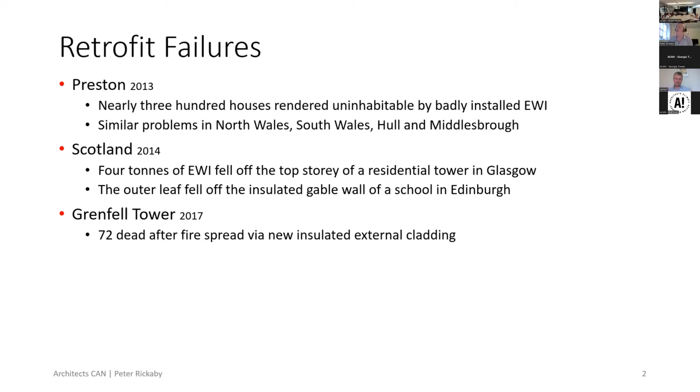There were some failures in Scotland in 2014, mostly to do with a particular big storm, which caused some collapses of retrofitted buildings. There was, of course, the Grenfell Tower, which you will all have heard of, and is still with us and still producing new revelations and new misery today. And then what probably most people haven't heard of is that there were numerous insulation failures in the period 2010 to 2020. I'm not talking a few hundred, I'm talking a few thousand, and they were mostly following poor installation of cavity wall insulation or external wall insulation or inappropriate installation.

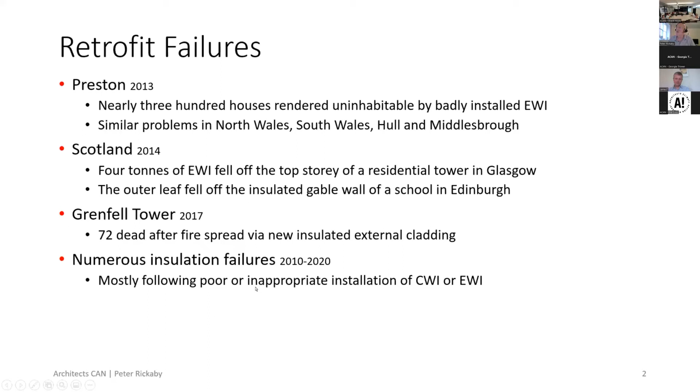So that all led to a review, which many of you will have heard of, some of you will have participated in, I'm sure, and that is the Each Home Counts review. It was industry-led, but sponsored by 2 government departments, led by Peter Bonfield from BRE, had multiple work streams and involved hundreds of people who gave their time up voluntarily for about 18 months to work in those work streams. It produced 27 recommendations, and the focus of Each Home Counts was on the consumer. It was about standards and enforcement and consumer protection and consumer advice.

Of the 27 recommendations, I'm only going to deal with the quality and standards ones, because that's really where PAS 2035 comes from. And then you might think that Each Home Counts has disappeared out of sight or sunk without trace. In fact, there was a 3-year period when it was being implemented by a cross-industry implementation board. I was a member of that board, and BEIS has to date spent at least £3 million and recently promised to continue to fully implement the review. So we are on a journey with Each Home Counts.

The review had 2 strategic objectives in response to those failures we started with. One was to boost demand for retrofit by restoring the trust in the industry on the part of consumers, housing organisations and government, and also reducing the risk to finance bodies to encourage them to fund retrofit, because of course the government's always been quite keen not to have to fund it all itself. But finance is only available if risks are reduced. And in fact, I remember being told by a banker from BNP Paribas that they had lots of money to put into retrofit, provided we de-risked it. And I was at pains to tell them we couldn't de-risk it, but we could manage the risks for them.

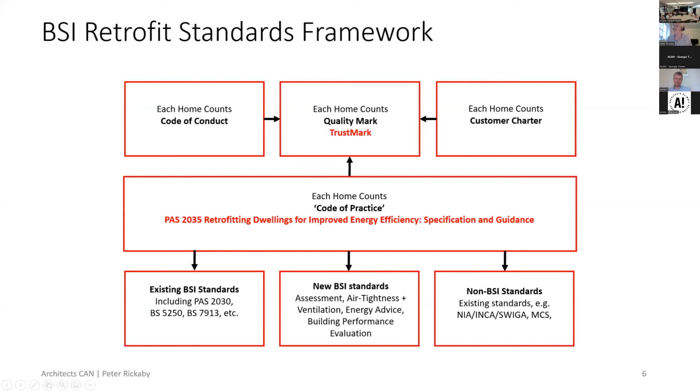So after inception and some advice, there is a risk assessment, which divides projects into high, medium, and low risk, and they follow respectively paths A, B, and C, three separate paths through the standard, through the PAS.

There is then a whole dwelling assessment, which includes an assessment of the existing ventilation and a significance assessment if the building is traditionally constructed or protected under BS 7913, to find out what its particular characteristics are that we need to think about. There then follows an improvement option evaluation.

The purpose of that is to determine what are the best measures to apply to this dwelling to get it where we need it to be by 2050. So it's looking at the horizon and looking at zero carbon. How do we get this dwelling to zero carbon? What are the best measures to do that?

And that then underpins a medium-term improvement plan, which is how do we get there from here? A staged plan from getting from where the dwelling is now to where it needs to be in 2050.

All of that is agreed with the client alongside some advice and becomes then sent to the designer for at least the first stage of the medium-term plan to design and specify it.

And the design and specification requirements are by far the largest part of PAS 2035. I'll come back to design a little later. Once we have a design, it's passed to an installer or a contractor.

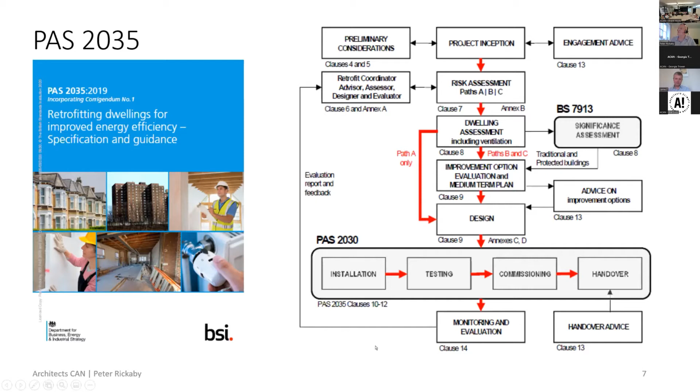To summarize it in a slightly different way, a few key points. First is that all projects must have a retrofit coordinator, which is, of course, the main topic of this evening.

There is a minimum professional qualification for retrofit coordinators, a level 5 diploma, but all the other roles in retrofit in PAS 2035 also require minimum qualifications, whether they be assessors, advisors,

designers, or so on. There is a risk assessment, as I said, based on pre-dwelling assessment data, which determines the path through the PAS. And the required qualifications for the professionals actually depend on the assessed risk.

Then there is a whole dwelling assessment, which covers six topics. It's way more extensive than an eco assessment or a Green Deal assessment or energy performance certificate, EPC assessment.

It covers the context of the building, both legal and geographic, the condition of the building, structure and damp and so on, the occupancy and the vulnerability of occupants, the energy performance in the normal way, capturing SAP data, the existing ventilation system, and the historical or cultural significance of the building.

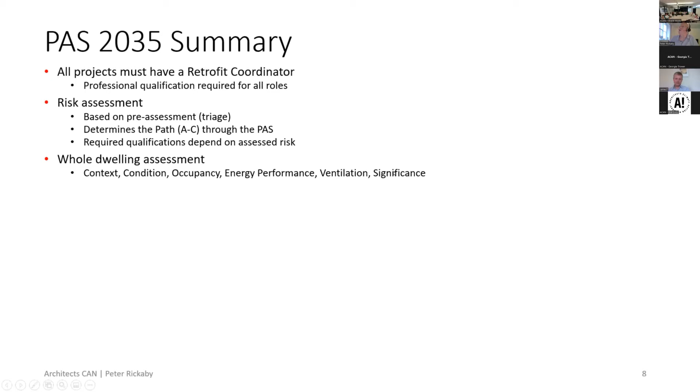Then there's a design process which starts with the improvement option evaluation we've talked about, to identify required improvements to 2050, and a medium-term improvement plan to establish a staged process for getting there.

There are then extensive design requirements, including attention to moisture management, thermal bridging, thermal bypass, interactions between measures, and so on. And there are additional requirements if the building is traditionally constructed or is a protected building.

For ventilation, the existing ventilation system has to be assessed as part of the whole dwelling assessment. And if it's deemed to be inadequate according to certain criteria, then it must be upgraded. Or if it will become inadequate because of the retrofit work, it has to be upgraded.

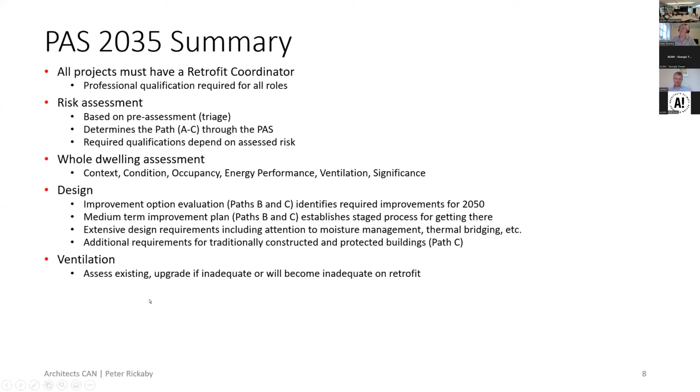Installation, as I've said, has to comply with PAS 2030 or the MCS standards. And then we have finally the post-completion evaluation process, where essentially we check, did we do what we said we'd done, and has anything surprising happened?

And we investigate discrepancies and any unintended consequences. So we're trying to close the circle with the evaluation process, which is interestingly something that the retrofit industry, or the energy efficiency industry, had never done before.

It had never agreed outcomes with its clients, because most of the clients were not the householders, they were the funding bodies or the energy companies, and they never checked afterwards that they'd actually achieved them. So we're trying to get the energy efficiency industry with PAS 2035 to do what any industry worth its salt would do,

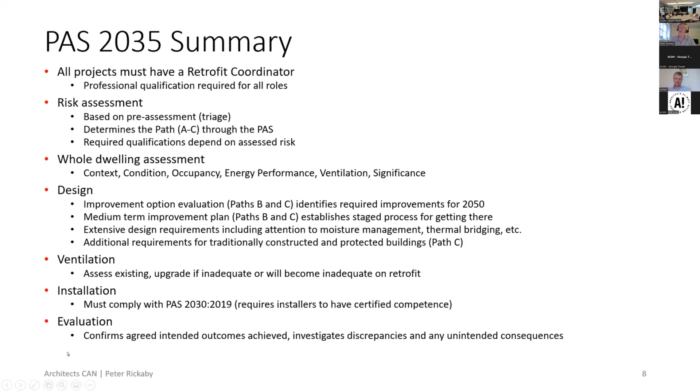which is to check with its customers whether they're happy at the end of the process. So to sort of summarize the quality assurance system into which PAS 2035 sits, we start, as I did this evening, with those failures,

which occurred around the same time as many of us who were architects doing work in retrofit were learning from programs like Retrofit for the Future, from the Centre of Refurbishment Excellence, Core, in Stoke-on-Trent, from the GLA Renew program, and other schemes where we were learning what could go wrong and why.

And how, and what to do about it and how to manage the risks. And that led us into the Each Home Counts review, and that led us to Trustmark, the retrofit quality mark.

Trustmark has two arms to it, if you like. One is compliance, auditing, inspections, enforcement, remediation, and redress. So that's to do with enforcing the standards, and in particular PAS 2035. And it also has a data warehouse where records of all PAS 2035 compliant retrofits have to be uploaded.

PAS 2035 is a requirement of Trustmark retrofit programs, and PAS 2035 itself, through the framework that we've discussed, brings in lots of other standards. So it's not just PAS 2035 as a process, it's all the standards that we know about that are valid and relevant to the project.

When it comes to installation, we have to install in accordance with the MCS standards or PAS 2030 or both, and records of all that work get uploaded to Trustmark, who can use the data in the data warehouse to risk assess what they audit and inspect, but also for research into how people are doing and who's cheating and things like that.

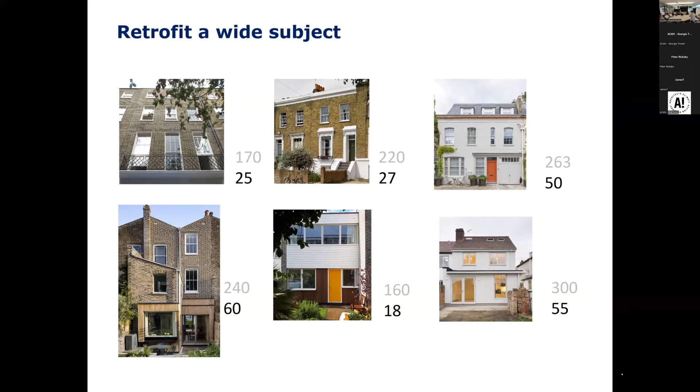The grey numbers are the specific space heat demands as found, and the black numbers are the specific space heat demand - the number you see on PHPP - when we finished. Quite a range of numbers and a range of starts and finishes. Oh, there we go, I don't know why that decided to animate itself. That's my own place, which we finished, or are finishing, after about 6 years of doing stage retrofit.

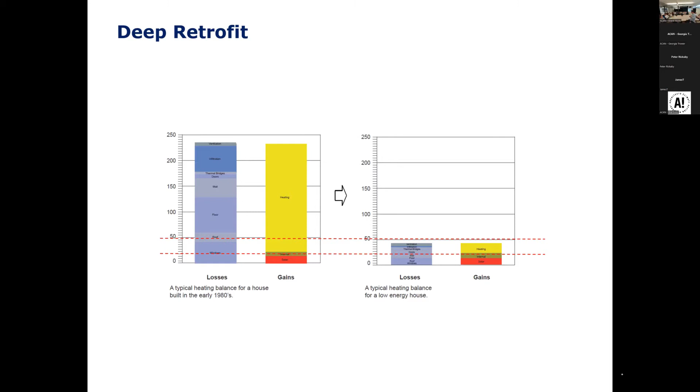I think we're especially focused on projects which aim fairly ambitious and are really what I call deep retrofit. That's a comparison of the passive house planning output of an existing building. The stuff on the left shows very big losses, very big boiler use to offset that, and on the right is where we like to be - much smaller heat losses, much smaller heating demand, where it's much more viable to use a low carbon heat source.

I think the other thing about owner-occupied dwellings, or private homeowners, is that they represent more than half of the housing stock in the UK. A lot of the larger scale retrofit schemes today have focused on social housing, and there are obvious reasons why. But even if we were able to sort out all the social housing in the UK, we'd only be touching probably 20-25% of our stock. More than 50% lies in this atomised sector of private homeowners. For me, that's one of the reasons I'm remaining committed to that sector, because it has the most potential if enough of those people step forward.

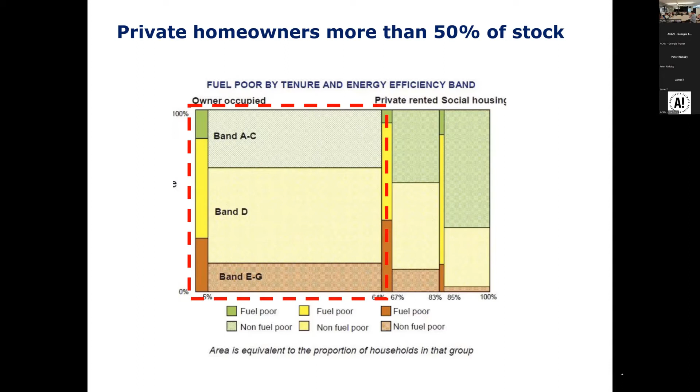Motivations for those people, or my clients, are usually these sorts of things. Health and comfort, increasingly important for a lot of people, and certainly for my own retrofit that was at least half the reason I was interested in sorting the building. Carbon emissions reduction, of course, and increasingly - for a long time we've lived with cheap fuel, and people have said the payback time on all this stuff is like forever. But remarkably, in the last 18 months that's been turned on its head, and it looks like we'll never quite return to the good old, or bad old, days of really cheap energy. I think it's probably a good thing, though in the short term a lot of people are going to pay a very heavy health and comfort price.

So I'm going to talk about our approach, generally moving through the key stages of the project. For us those are assessments, which Peter spoke about, design, forming a whole house plan - to use a typo at the end - coming up with a set of measures, thinking about what the real predicted energy use is likely to be, and then through planning, delivery, and onto evaluation. This image, apart from an easy joke about does my bum look big in this, is me trying to say we're really keen at the early stages of projects to get underneath the skin of buildings and understand them quite intimately, because it's often the small details which really drive the risks and drive the solutions.

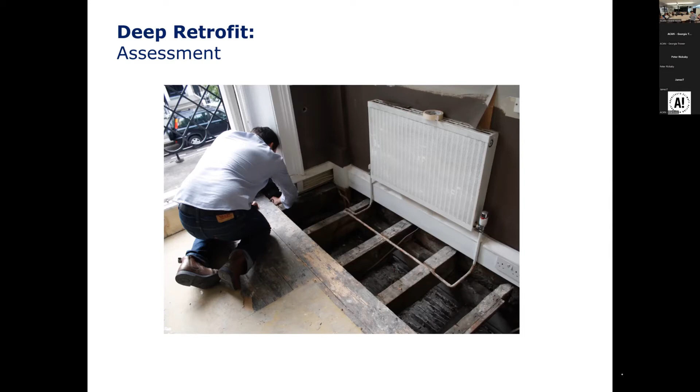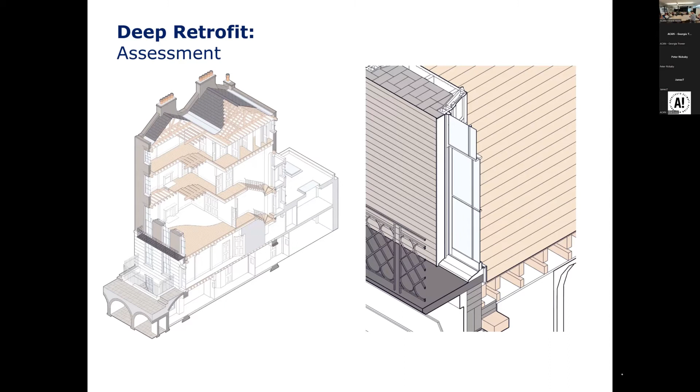So opening buildings up as early as we can is really important, particularly on a building like this, which is quite complex, historic. And then converting some of that information into drawings to sort of understand how buildings go together three-dimensionally, so that we can start to think about how insulation might overlay the structure in a positive manner and in a safe manner, and in a manner which the conservation team might find palatable.

That assessment involves going around the buildings, looking at them in different ways. So thermography is often a useful technique to sort of put on the X-ray specs, and in this case we

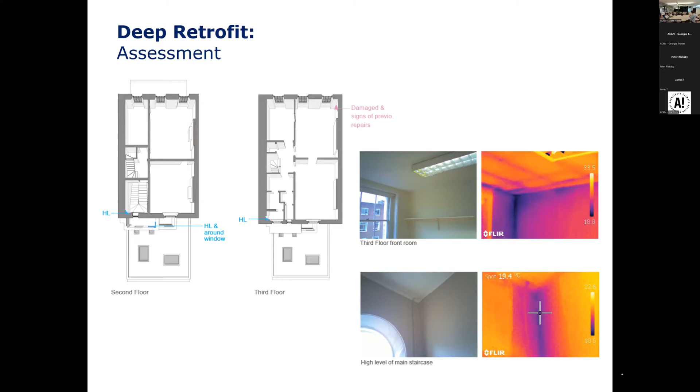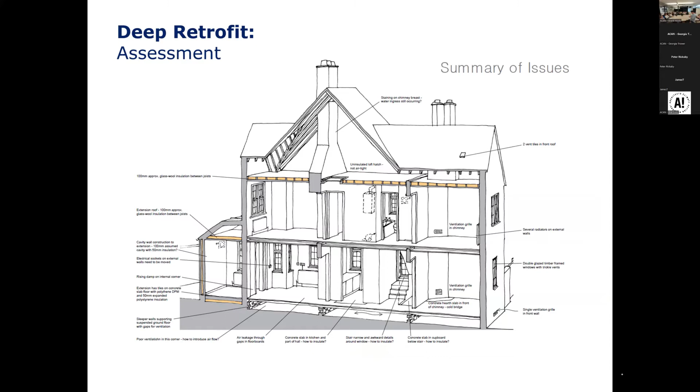found both thermal bridges but also moisture problems were showing up through thermography. And then again, we like to try and put all that information together in some kind of record. One form of that record, rather than sort of 5 pages or 20 pages of text, is sort of a 3D assemblage of some of those observations of the building.

So I think the longer we work in this sector, the more time we spend on assessment. You might think it should be the opposite, that the longer we're doing it, the easier it gets, but actually the more we realise understanding that stuff early on is really crucial to really getting to the end.

So clients often approach us and say we'd like to go to EnerPHit. We said we'll look at that for you, but let's see where we might get to. Is that realistic? Is that a safe thing to do?

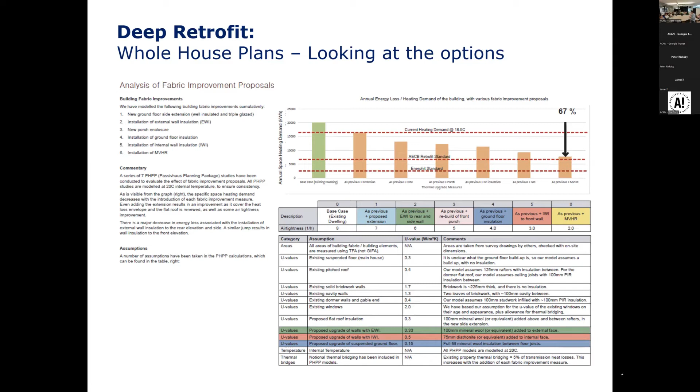So all the stuff below the graph, by the way, is all the assumptions that we put into the model, which we try to articulate very clearly, because there are always lots of assumptions involved, so it's important to record those as we go.

So there's quite a lot of computational stuff going on, but then there's also some architecture happening parallel to this. There might be an extension, a refurbishment, or a reorganisation of a house, and then we try and pull the retrofit stuff together with the architecture stuff and present it in a three-dimensional manner again, so that it's meaningful to us and to our clients.

And so, especially our clients, they're not building professionals, and often technical plans and sections are slightly lost on them. So we always try to go back to 3D. And 3D always informs us where we've made mistakes in the areas and the stuff we've got to resolve later on, in detailed design.

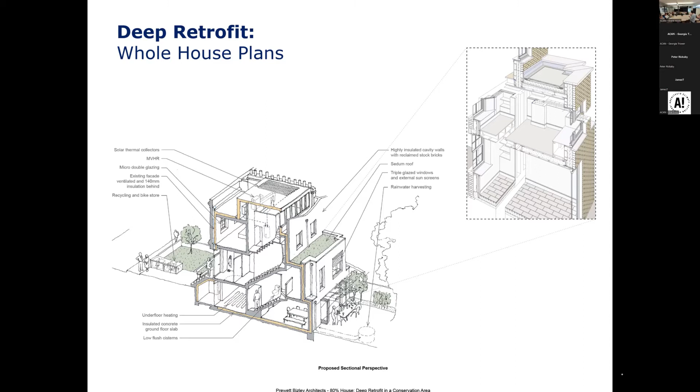This is another sort of simpler way of doing it, where we've shown kind of where the key retrofit measures are being applied to a building section. So insulation, glazing upgrades, M&E, heat delivery, and so on. It's a sort of a simple kind of graphic that people can

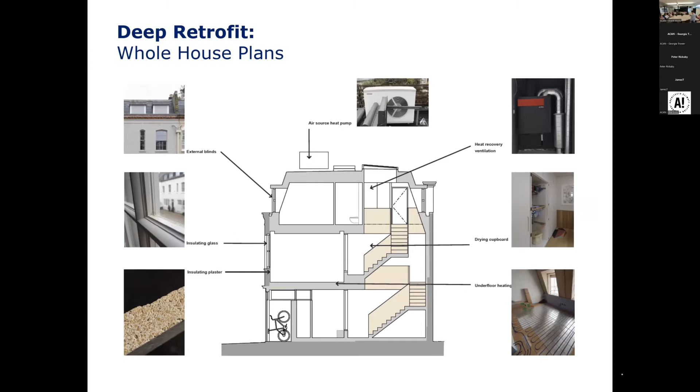understand. And at the same time, as we think about, we're often very focused on the space heat demand, because that's where most carbon is deemed to be. But we increasingly spend more and more time evaluating, is this leading to increase or continued overheating risk?

So most of our projects are in central London, and I think it's fair to say, almost all houses suffer with some degree of overheating. That's just going to get worse and worse for us.

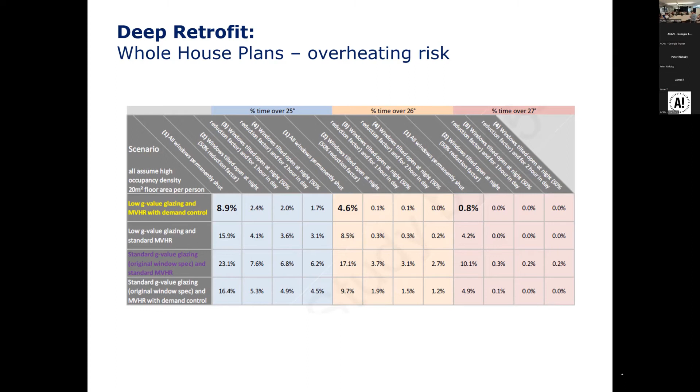So this is sort of a PHPP stress test model we used on a project a few years ago. There's quite a good tool at CIBSE recently, which we're starting to use as sort of a regular assessment too. So, but overheating, I think, was for a long time sort of forgotten.

So key things in whole house plans that we try and get to as early as we can in the project, so by sort of stage 3 of RIBA.

So decide what the fabric measures are, really have a sense of how thermal continuity and air tightness continuity is to be maintained, and really start to resolve all the interfaces, because Peter's probably recited 10,000 times that retrofit generally goes wrong at the interfaces, the junctions and the corners and so on.

Having a ventilation strategy quite early on, both one for winter and also one for summer. So one that works with the overheating de-risking, and one which manages heat loss in winter. Designing in increasingly low carbon heat now.

Until recently, about 10 years ago when we started, the mantra was gas boilers are the way to heat. And that's just been completely turned on its head in the last 4 or 5 years as electricity has decarbonised massively. It's one of the few success stories of the last 10 years. Planning in the potential for renewables, even if those follow later.

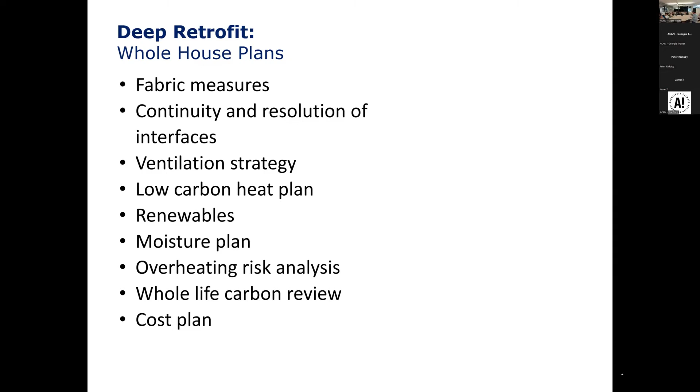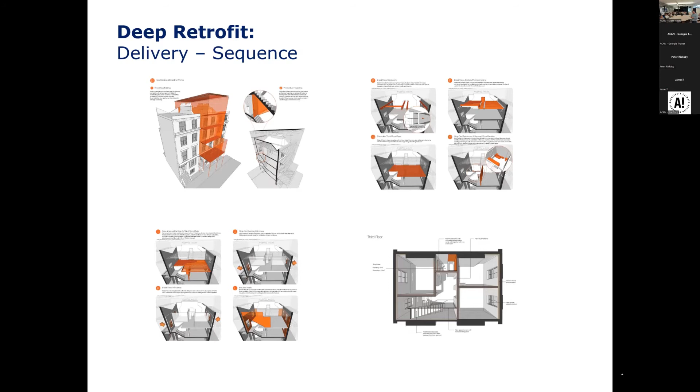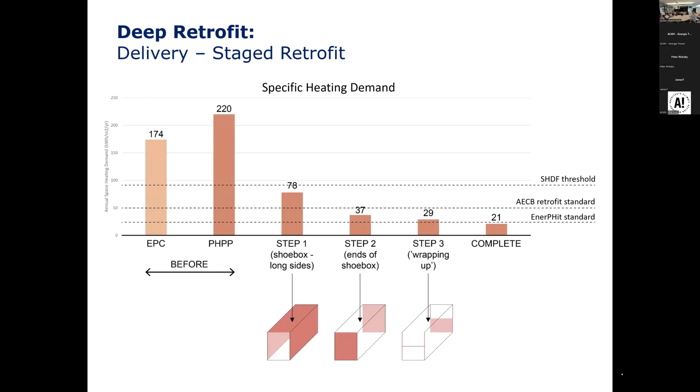So delivery, we'll often try and plan the delivery of projects at quite an early stage. We'll think about that three-dimensionally, because the sequence of how things go on determines how successful the retrofit's likely to be. Sometimes we'll think about staged retrofit, and this is a slide illustrating how we approached my own house. My own house is a 1960s building, essentially a shoebox. Step 1 was to insulate the long bits of the shoebox, and step 2 was the ends of the shoebox.

And that's how it panned out over time. This is actually a post-rationalised slide. It was meant to happen in about 3 years. It's taken about 6. But it's been quite warm for most of that. So this is a bit of my own project.

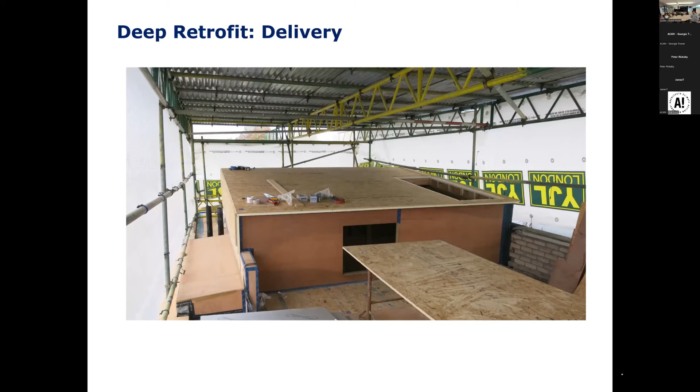So naturally, I had quite a lot of time on site to manage things and to ensure thermal continuity and to manage this roof, design out as many cold bridges as we could. The contractor participated in that process. Coordination on site for me is often about getting the holes in the right places so that things join up and ducts can pass through bits of structure.

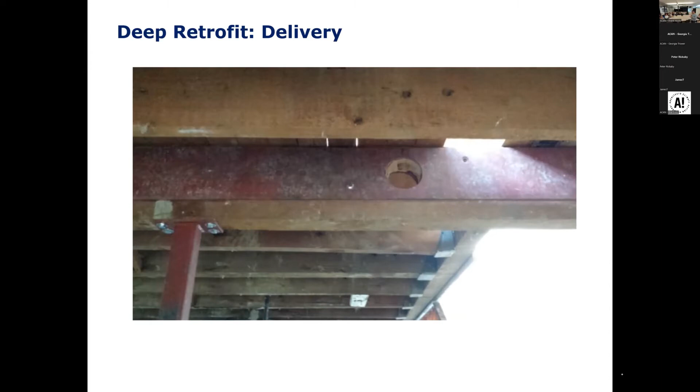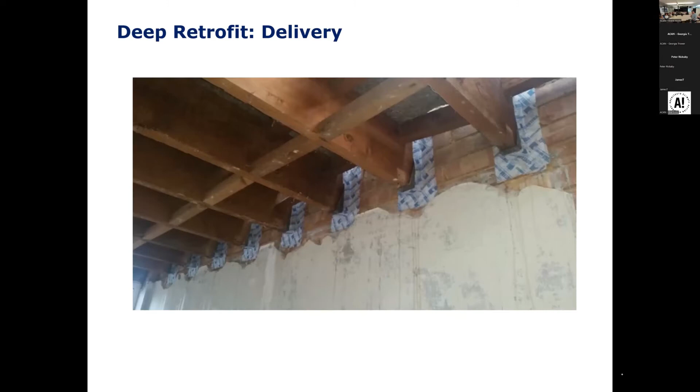Talking about air tightness, this was relatively easy on our house, but there was a little bit of tricky taping to do. And then testing too, and measuring and understanding where you've got to. We managed to get down to Passive House levels of air tightness.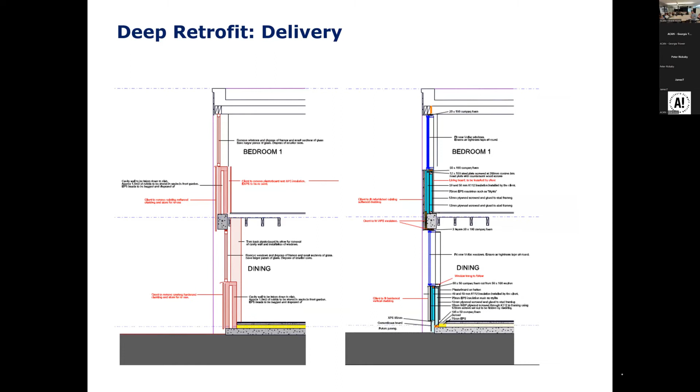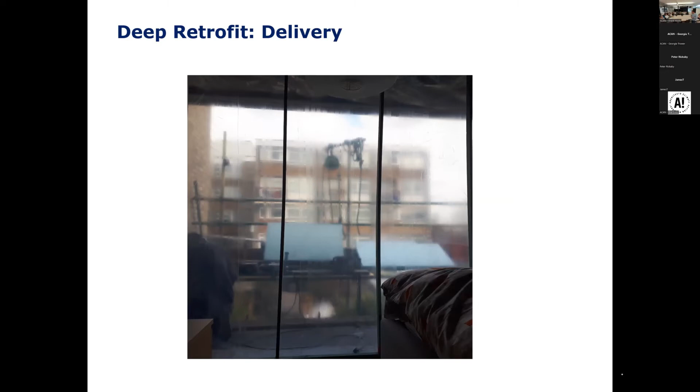In stage 2, which is the ends of the shoebox, we rebuilt the infill to the ends of our home almost completely. So we completely took the wall away. That's a view from my bedroom the day after they started. Very glorious, but we were woken up by the birds. There's the elevations going back in and the glazed components, and there's somebody fitting insulation around quite a tricky cold bridge.

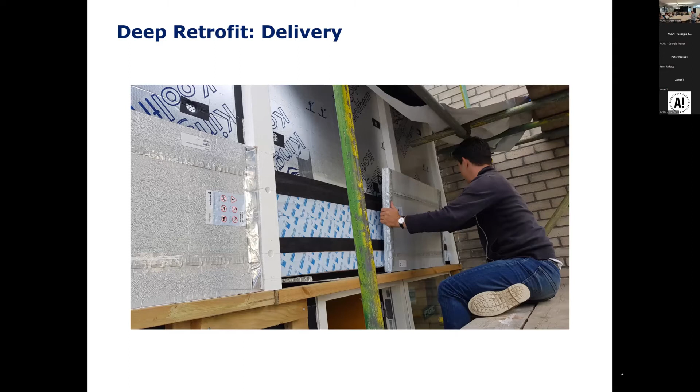So delivery, it's really important to spend enough time on site, checking that things are going as planned, actually carrying on that assessment process as you open up the building and find, oops, it's not quite as you thought it was. Accommodating change, so architects know that there's always lots of change when you move to the building, and managing that, managing your risk register, and ensuring that buildings are adequately commissioned and handed over at the end. Traditionally, our industry's been really bad about that, and it's especially important for retrofit.

So finally, a bit about evaluation. Peter flagged that up as being really important in terms of closing the circle and trying to avoid just carrying on making the same mistake again and again, which is what retrofit's been doing. So this is a summary of the project I showed at the start. Measured data on the left-hand side, our PHPP prediction for the full retrofit in the middle, and then what we actually ended up with afterwards on the right-hand side. So actually the heating and hot water did even better than we imagined.

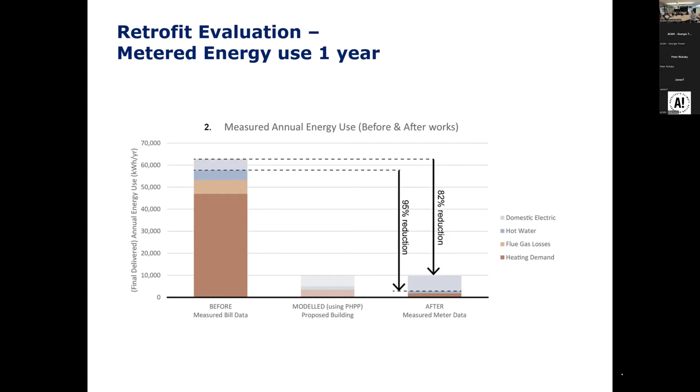The clients ended up using more electricity in the house, but pretty much on target, and sort of 80% and 90% reductions depending on the figures you look at. This is another house that the clients measured the energy use for 9 years, and you can see it's not changed, which is encouraging. The airtightness hasn't fallen apart, the insulation hasn't blown off.

So very, very low space heat demand, close to EnerPHit levels, quite good PV input, offsetting quite a lot of electrical load, and nice flat lines, fitting in well with the recent LETI guidance, and almost matching up to it. This is a building, of course, with a boiler, not a heat pump.

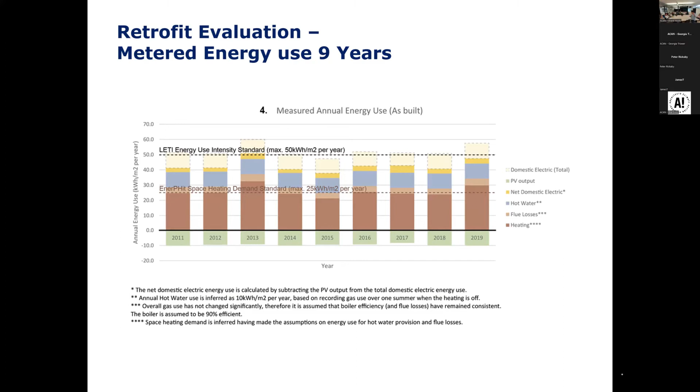Think about embodied carbon, I said earlier on. So again, the project at the start of the show, we tried to assess how embodied carbon went in. And pleasingly, most of the embodied carbon was in the energy saving measures. We managed not to spend too much on the other stuff, finishes, the timber structure and the steel, which I've called loosely the architecture. So you want to be spending on the green stuff if you can.

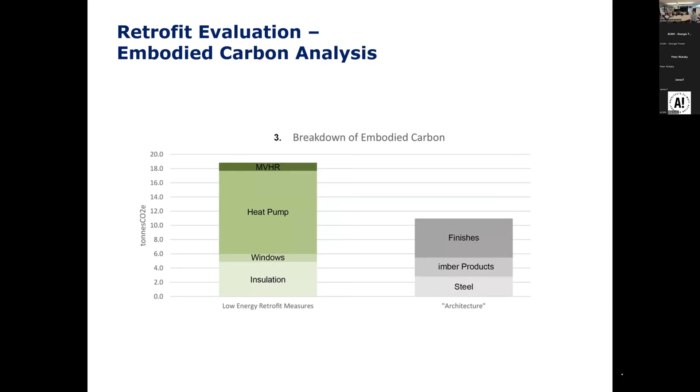And again, comparing this whole life carbon in 60 years. So if that building carried on business as usual, you'd be looking at the orange lines, but assuming it carries on as per the first year, the green lines, the dotted lines, by the way, if the grid really decarbonises totally by 2040. So we actually head very quickly towards a flat line. And the really important bit is where the red circle is. When do those two lines cross?

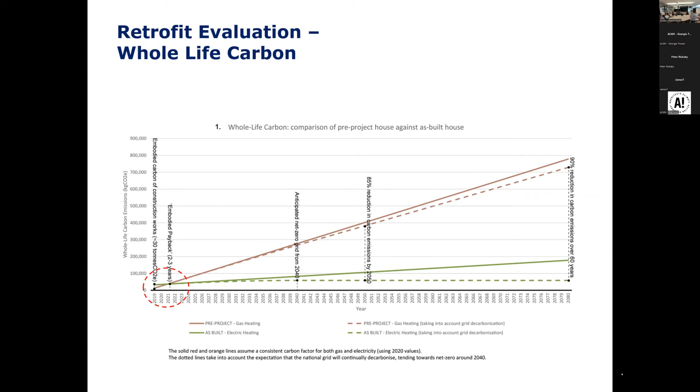Because we spend a carbon burn at the start of the retrofit, spending carbon. How quickly do we make that back through the efficiencies in the operational carbon? And we want that time shift to be as little as possible. 2 to 3 years ideally, not 10 years, because we've only got less than 10 years left to try and sort things out. Right, that's me.

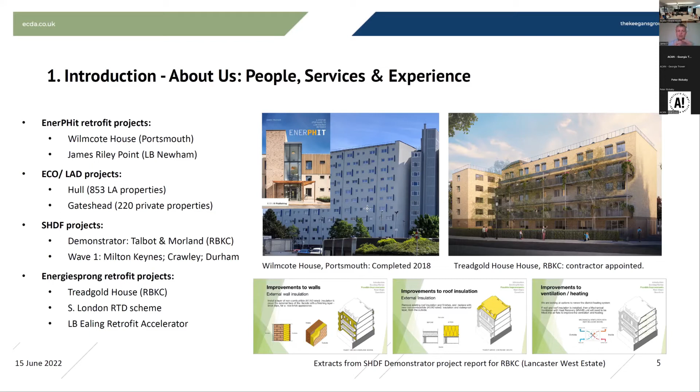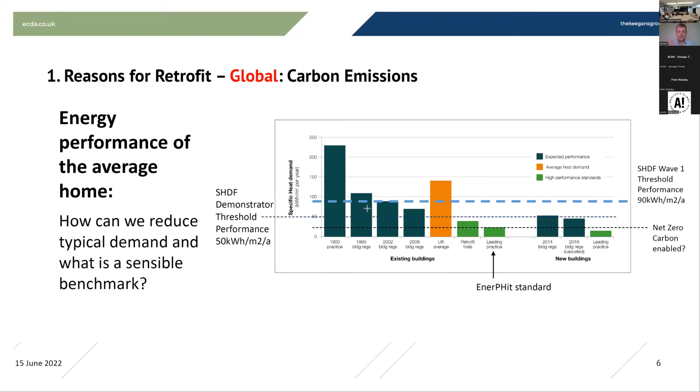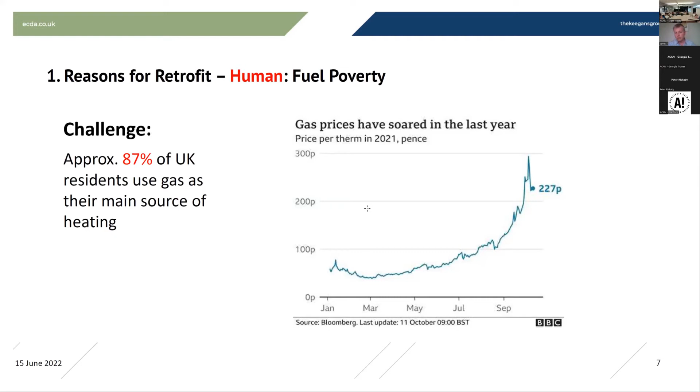And the SHDF fund, which I referred to, is nearly 4 billion over the next 10 years, and that's ramping up, but there will need to be more, and it will need to tackle other sectors as well. So next slide. This is a project that we're working on at the moment, which is a deep retrofit project at or near EnerPHit standards. One of the projects is Energiesprong level standard for the Lancaster West estate, which is the estate to which Grenfell Tower belongs.

As you can imagine, there has been a very lengthy period of consultation with residents, and for those of you who've read or heard the outcomes from the Grenfell inquiry, not completed yet, there are many issues, but one of them being the very, very poor information provided to residents through the previous refurbishment of Grenfell Tower. So the landlord, Kensington and Chelsea, and the Lancaster West estate team were particularly keen to ensure that in refurbishing the homes, making them low energy homes, residents were very much consulted as part of the process. So I'd say that would be the high watermark, the most intensive consultation process that we've undertaken, but for obvious reasons.

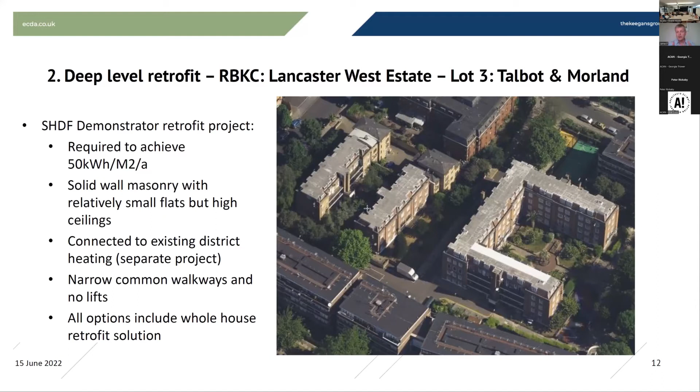It's currently on an existing heating system, and that is actually leaking heat and causing overheating problems. But it's a 1930s mansion block. It's not listed, it's not in a conservation area, but it has architectural qualities that we would want to retain.

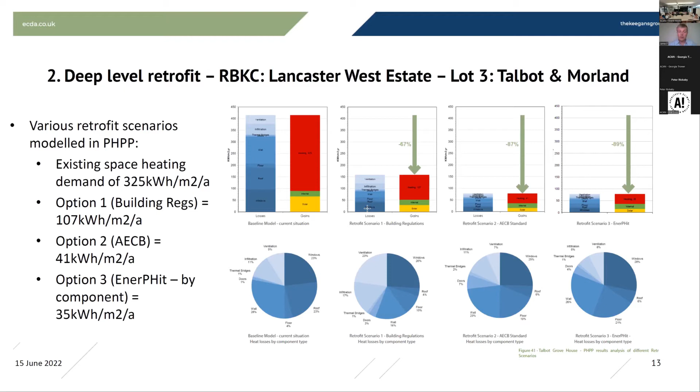So we've looked at the existing space heating demand, which is extremely high, as you can see there, modelled in PHPP, and looked at options to reduce that, and considered whether it's ultimately the AECB or Enerphit component standards that we go for.

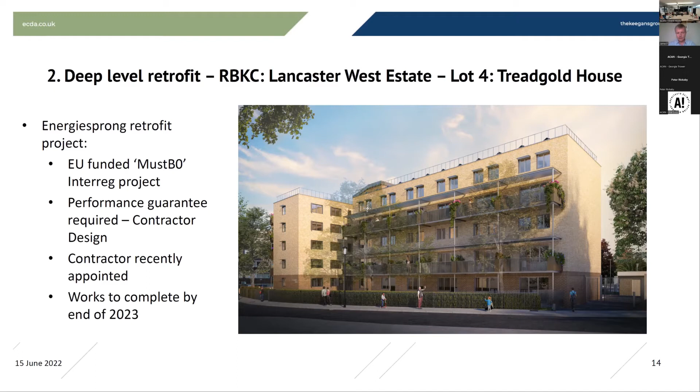But it's going to be a deep reduction alongside a new low carbon heat network as well. One of the other projects on that estate is the Treadgold House project, which is a 1950s deck access block, and that one has received EU funding through the Interreg programme, MustB0, and the contractor is required under Energiesprong to provide a performance guarantee on actual performance. The contractor has recently been appointed, and that one is going on site soon.

That's it, and that's just to recap on what I was saying about the level of consultation and co-design process. There's a lot of information actually available online about this project through the wearew11.org social media programme and website, showing the kind of consultation we've undertaken through the course of the work - workshops, videos.

Even through the depths of COVID, we were going out doing videos on the estate talking about ventilation, how to tackle heat loss in buildings, talking about some of the geeky, techie stuff about thermal bridges, but putting it in layman's terms, and talking about the real problems people were facing - the damp, the mould, and how we were going to tackle those.

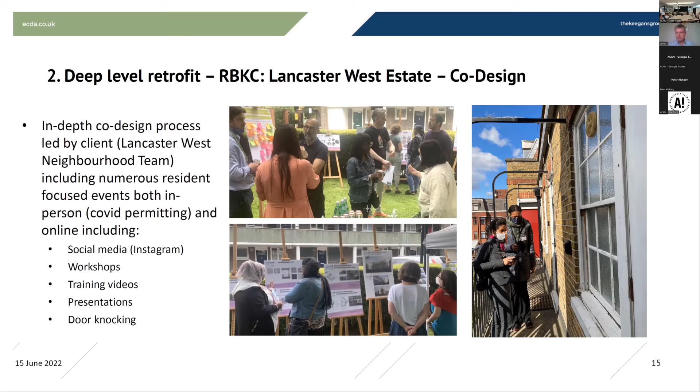So it's traditional media, traditional approaches like door knocking, but also modern methods including social media etc. So I think that's it from me. I'm going to hand over to Claire now, who's going to talk about one of our projects for Milton Keynes, which is a medium level retrofit, I would say.

Great. Hi, I'm Claire Raftery. I'm an associate and retrofit coordinator at ECDA, and I wanted to talk to you today about a large-scale mid-level retrofit that we're currently working on with BEIS, which is Netherfield Estate.

Netherfield Estate was designed and built in the 1970s and was one of the first completed developments in Milton Keynes new town. The site covers 6 roads running northeast to southwest and has over 1,000 dwellings. The houses are timber construction for all external, internal walls, floors and roofs, allowing properties to be built quickly with semi-skilled labour, responding to demand for housing at the time.

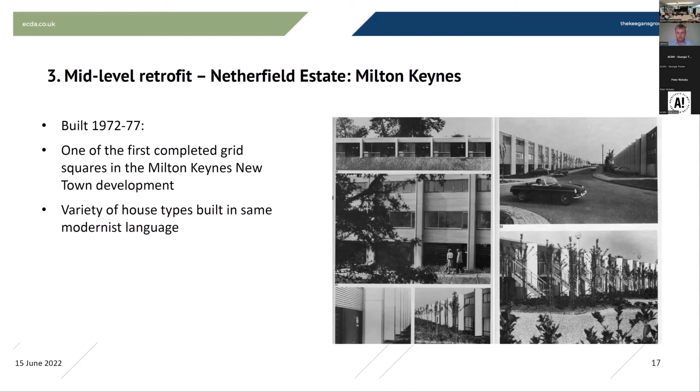The topography of the site is sloped, but there's a common roof line across the estate, giving variance in architecture. Vertical GRP fins on the front facades provide privacy and a unique modernist view down the road.

Through SHDF funding, ECD and Keegan's have been asked to look at retrofit assessment, coordination and designer services for 302 properties. When working on retrofit at scale, one of the first tasks is to identify the archetypes. As mentioned, the site is sloped with a consistent roof line, giving us a mixture of bungalows, 2-storey and 3-storey properties.

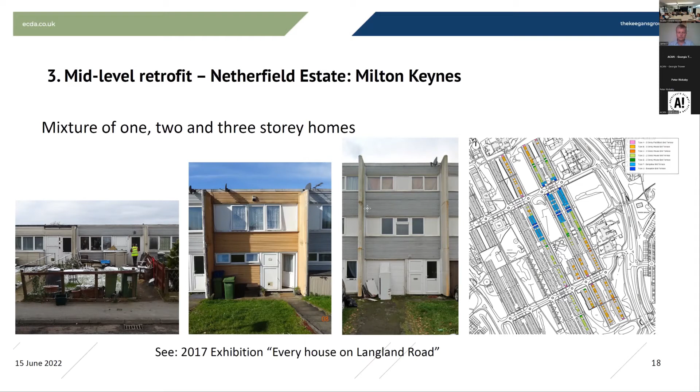Overall, we identified 7 key archetypes and a couple of sub-archetypes. For each property type, for example bungalows, we have a mid-terrace and an end-of-terrace property, and each of these provide a different heat demand. Once archetypes have been established, we can look at the buildings in more detail to understand where they're not performing. The retrofit assessor will carry out an assessment for each property, which starts to build us a picture, and we can then put together PHPPs of the existing archetypes.

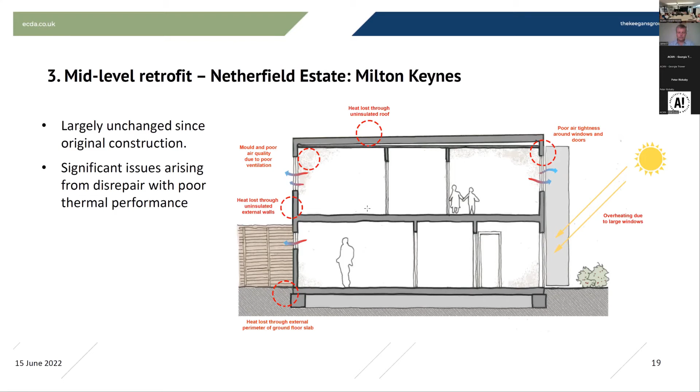Netherfield Estate has received funding through SHDF Wave 1 and therefore has to meet funding criteria. As part of this, we have to outline what the intended outcomes are: reduction in energy cost and alleviation of fuel poverty, reduction in emissions associated with energy use, improvement in internal comfort, meeting performance standard of 90 kilowatt hours per meter squared per year, reducing risk of overheating, elimination of condensation, damp and mold, and a reduction in energy use.

As mentioned previously, the key measurable criteria for SHDF is to meet 90 kilowatt hours per meter squared heat demand. Under PAS 2035, we use design SAP to produce proposed EPCs for each property, outlining the measures to form part of the medium-term improvement plan. Design SAP is a very useful tool for working on a large number of properties. However, for accuracy, we've also created PHPP models to model the different scenarios.

The existing PHPPs showed a heat demand ranging from 141 to 290 kilowatt hours per meter squared, so significant reductions were required. You can see in this table the various measures we modeled to understand how we can meet that 90 kilowatt hour target.

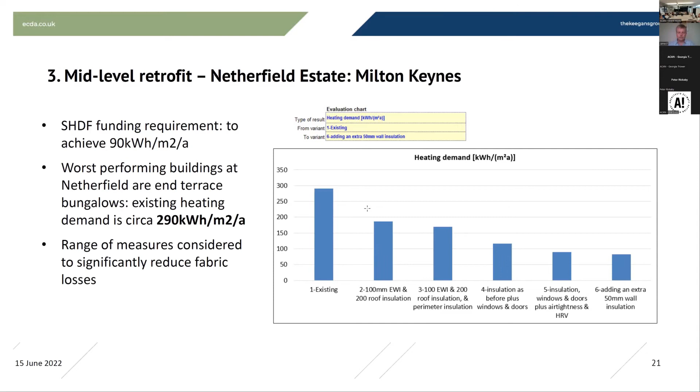As an overall strategy for the retrofit design, we agreed with our client to design to the worst case scenario, which for Netherfield is an end of terrace bungalow. Properties with better form factors can then benefit from an even lower heat demand. The reason for this is to simplify the number of systems being installed on site to achieve economy of scale and improved quality of install.

The measures required to achieve 90 kilowatt hours on a bungalow include new external wall insulation, new high performing windows, new flat roof insulation, a reduced glazing area and an improved G value. There's also below ground insulation around the perimeter of the building, and new through wall heat recovery units.

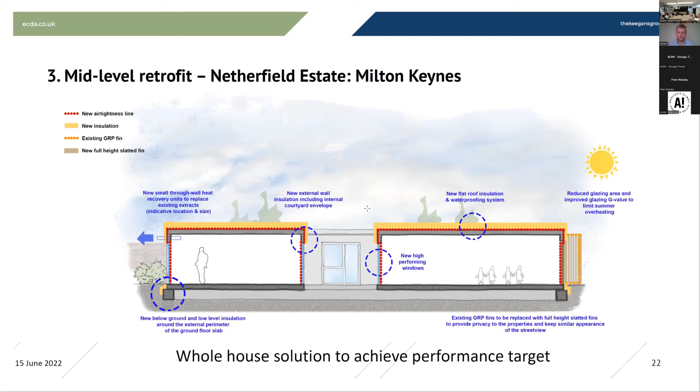We weren't able to do extensive work internally, so therefore we couldn't install a full MVHR system. However, we were able to install localized heat recovery units. And then we also have to remove the GRP fins, insulate behind them, and put something else back.

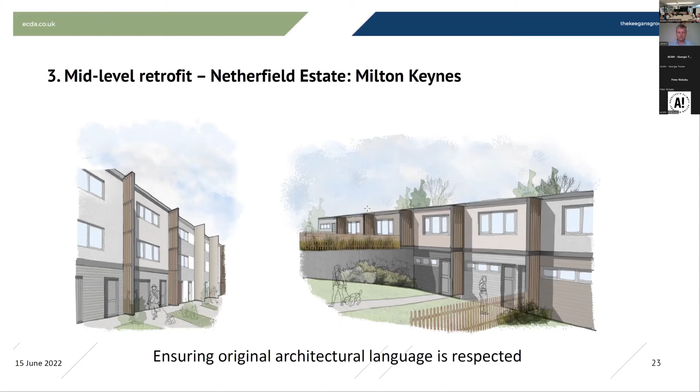So yeah, I'm John Albert, Keegan's Retrofit Coordinator and Assessor.

We've been going out to do a lot of large scale projects. The one we're talking about now is in Hull. It's 853 properties. Obviously, on this sort of scale, the issues really vary. One of the major problems is gaining access — there's a lot of arranging to try and get into properties of that sort of number.

I guess, a real learning curve for not just ourselves, but the contractors involved and the council involved. When we first started this project, they really only wanted to just do EWI, nothing else. So we had to walk them through the process and encourage them to look at windows, ventilation, and also the loft insulation.

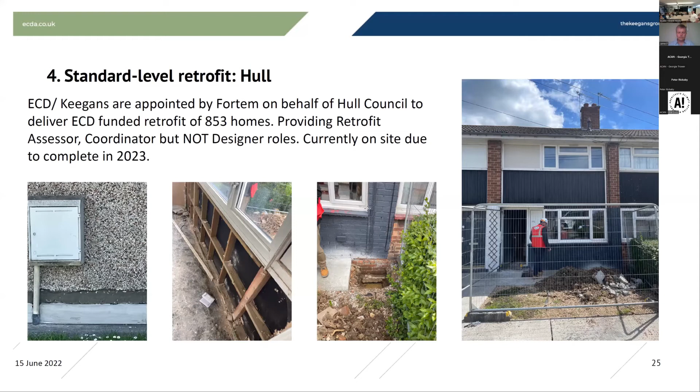I guess the methodology that we're following — everybody's really talked about it. We do the retrofit assessment, and that then formulates into three parts: the RDSAP, which is the energy report; a condition report, room by room; and an occupancy assessment.

Once we've gone in and done all these three reports, we take the data from the energy report and run it through Design SAP to give us a base model. That will give us a heat demand for that specific property.

One of the things that we find is very important on a large scale is trying to identify, by looking at all the properties, what the archetypes are in order to maximize and get the efficiency. What we try to do is create floor plans for each of those archetypes, and we'll model each of those archetypes.

And then we might have 5, 6 or 10 assessors going out. What we try to do is get them to have one floor plan that they'll work to for that specific archetype. They'll go in and know the measurements, but they'll need to double check them to make sure they are the same. That then helps us going forward with our Design SAP, although each property has to be done.

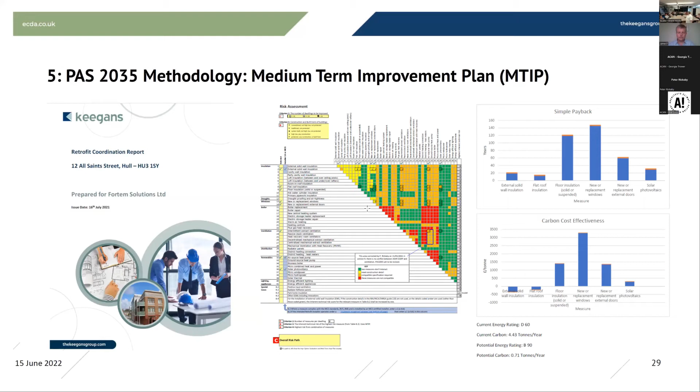So the medium term plan - we've spoken about it before. It's basically taking all of your measurements from the baseline. You do Design SAP for each measure that you're going to implement - one for the windows, one for the EWI, one for the roof insulation - and you then add them all together, and it will give you the reduction in carbon, your reduction in heat demand. The risk matrix here is basically just making sure that each measure you're adding in isn't clashing, so it gives you that assurance that what you're doing is correct.

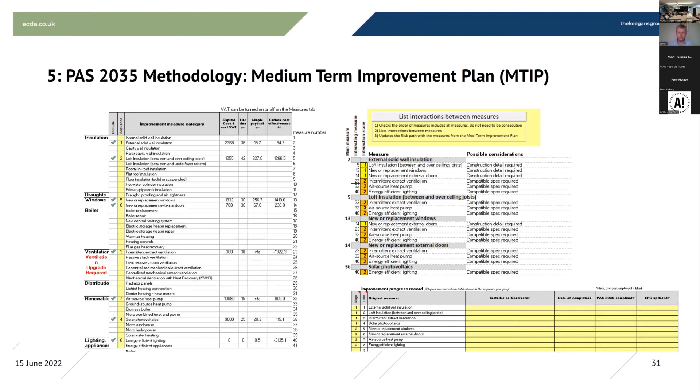So this basically shows you where your costs are for each measure, and how that can reduce your heating, hot water, and electricity demand. And that's basically just going through the different measures now.

So, lessons learned. The important thing, as I said, is trying to understand these archetypes, sub-archetypes and variants. It can be quite confusing because you have a mid-terrace, an end terrace left hand, end terrace right hand, but then you could have one that's got an extension on the back or slightly different.

So it can end up with probably 80 different variations and trying to work that out. Sometimes on some projects we've realised it's best just to forget about the archetypes and survey them all as individual properties, because it's just so complex. But where we can, it's really good to define that.

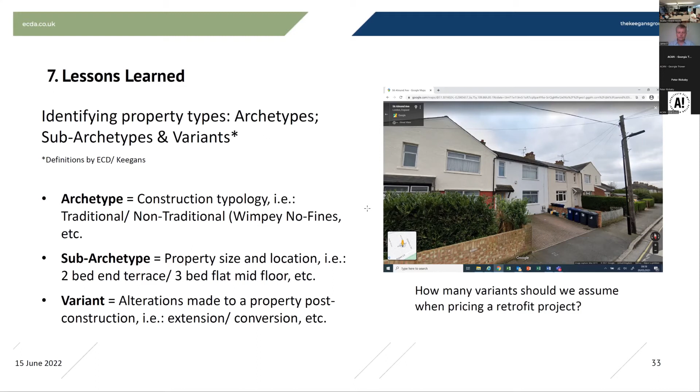And hopefully, as Peter said, somewhere in the future things might change with PAS 2035, that they might relax this requirement somehow. I don't know if we always have to go in and do a condition survey on each property - I would think that we do, but somehow maybe that will change.

So there's always, what we've come across so far in every project we've done, certain aspects that always seem to be a problem, especially working at scale - things like the meter boxes, having to try and persuade the council or the contractor to insulate behind the box, or certain elements - it's quite a struggle. So what we have to do is where we've come up against a risk, we have to do a side calculation to try and mitigate that risk, or determine whether it will actually cause condensation or damp issues.

So with a block of mid-terrace properties, a terrace where one or two are council properties, you've got to understand what happens on the party wall where the council property is being insulated and the private one isn't. So again, what we have to do is calculate that as a side calculation, to make sure it's not going to make things worse.

Typically, what is recommended is internal insulation, but it's not always possible on these projects. We're talking at scale for hundreds of properties. The cost of that would be astronomical.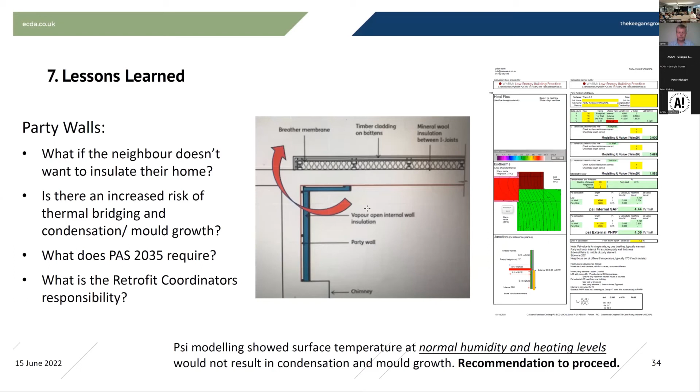That's well done. Thank you very much.

John and James, very comprehensive account of working at scale on retrofit. We're now moving to questions, but we've got Lisa.

I hope we've got Lisa Pasquale joining us, who is from Retrofit Works, and she's responsible for their overall strategy, their technical strategy, Retrofit Works for domestic projects. She's a trained architect and a chartered civil engineer with over 10 years experience in low energy construction and building performance. Okay, so we'd start with a question from the virtual audience.

Augustin, start at the top. I think that first question is to Peter, but I think he may well have already answered it in his presentation, but it's probably good to ask it again.

Should the role of retrofit coordinator be separate to that of the contractor for PAS 2035? Who asked that question? And architect - should they be separate from the contractor and the architect? This is a question for Peter.